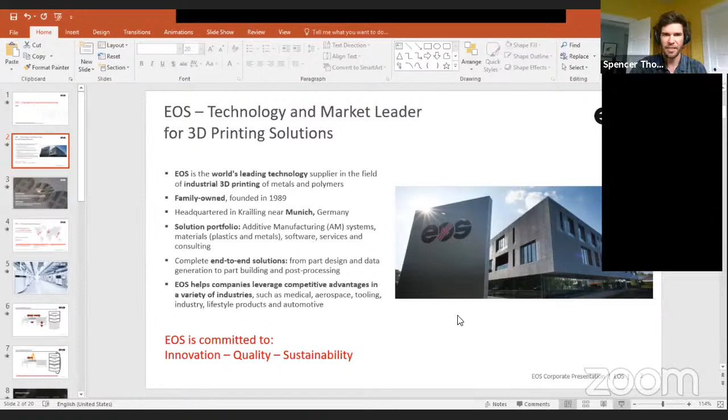And I think this statement here is important for EOS. We believe that additive manufacturing is going to provide a crucial part of the future of how we make parts as a society. And so everything that we do is trying to drive the adoption of additive manufacturing into new application spaces, new industries, and just get more and more parts made.

And just for understanding, you have been on the market since 1989, and you went first with SLS or with DMLS? Yeah, so it was SLS. I think one of the first ones was actually sand, if I'm not mistaken. So we used to make sand molds that could then be used to cast metal. But we started with polymer and then metal systems maybe 20 years ago. So you have been at the front of the line in these technologies.

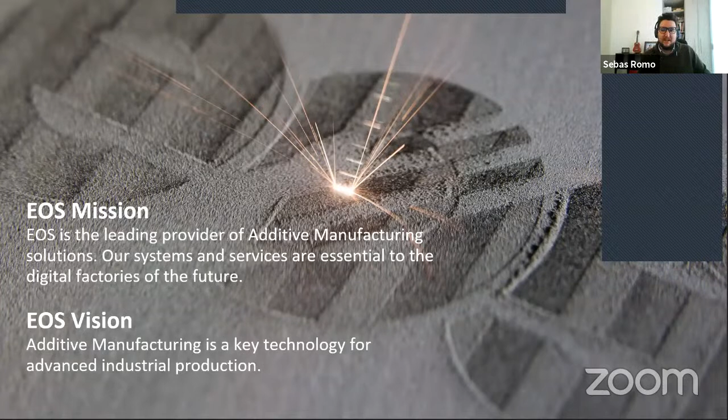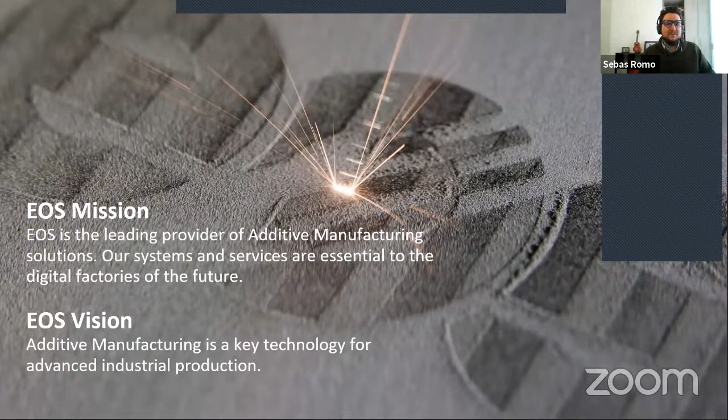Yeah, I'm the same age as EOS. So I was also born in '89. I'm also from '89, so yeah, nice, the same age. So please continue. Tell us more about EOS.

Yeah, just one more general slide. We've got well over 3,000 systems in the field now.

Metals has overtaken polymers, but it was only a few years ago that there was more polymer systems than metal systems. So now metals has overtaken polymers, which is a win for me. Our gross sales are roughly 350 million, and we have our headquarters in Munich, Germany, but we have 2 sites over in North America, one outside Detroit, and then our headquarters in North America outside of Austin, Texas, where I'm located.

Yeah, I had one more. Sorry, yeah, I think this picture is really cool.

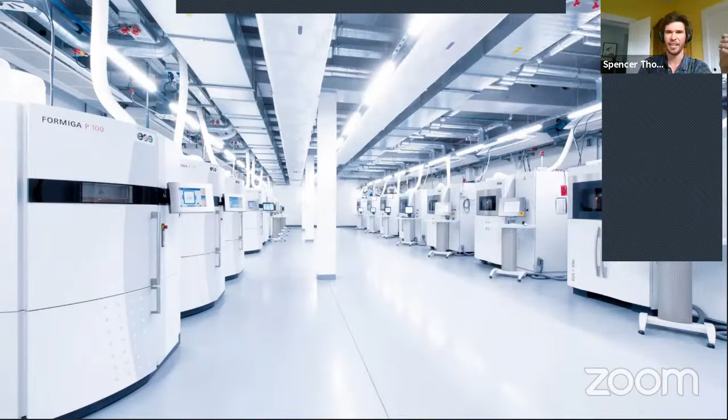So this kind of shows what the future of manufacturing will look like and does look like. This is a room in the basement of our headquarters in Germany. These are all polymer systems, actively manufacturing parts for our machine production. We produce a lot of parts such as ductwork and handles and things like that on our own systems. I just think it looks super cool to poke your head in that room and see all those machines running.

Printers doing printers, yeah, right. A little bit of a Terminator aspect to it, but of course.

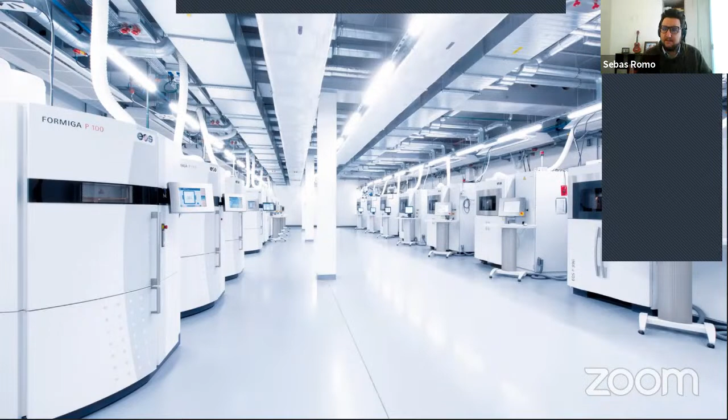Please tell us about, we have talked before with people in the webinar, we have explained mainly how the different additive technologies work, but please go ahead and tell us more on how metal 3D printing works.

Yeah, so it's pretty straightforward. It's based on having fine metal powder, and that powder is then consolidated with an energy source. For us, we use a laser. There's other ways, like the E-beam or different ways to consolidate the powder. But essentially, this is how it works in the diagram here.

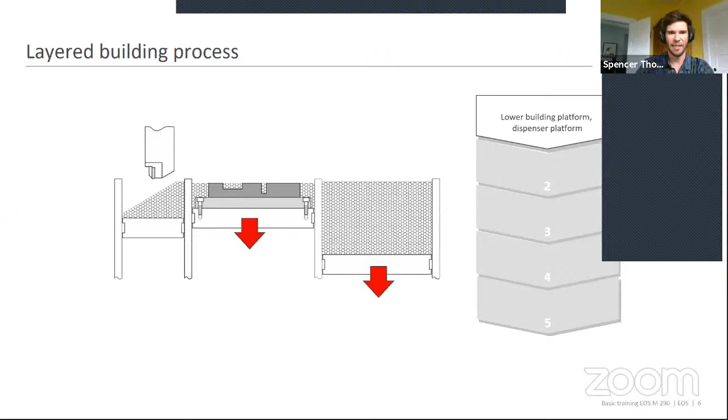On the right, we have our powder dispenser, and that's where we keep the clean powder. Then in the middle, we have our build platform. It's usually a similar alloy to what the powder we're printing with is. And then on the left, we have our overflow. This little piece in the middle is called a recoater.

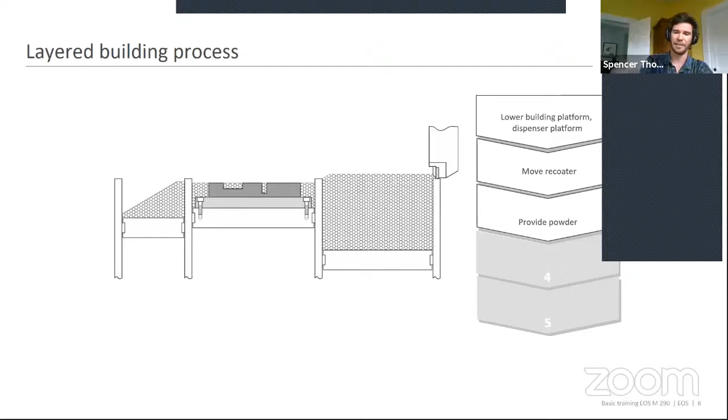So the recoater goes over, the powder dispenser comes up, and then we spread a layer of powder over our substrate. And then we use a laser to fuse that powder to the layer below it or the substrate. And then we do that thousands of times, and that eventually will have a part.

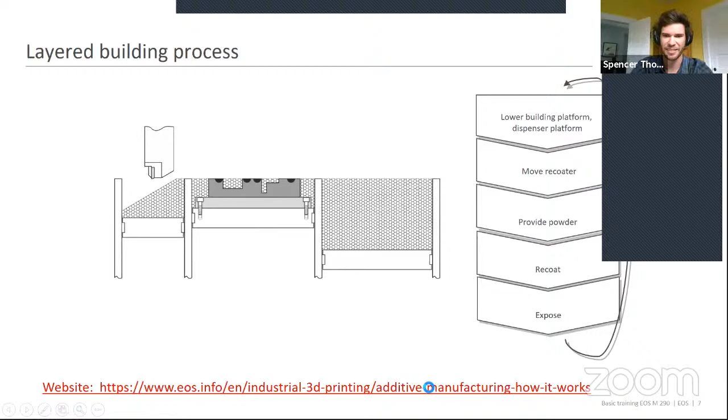It does. And you were telling us? Oh yeah, I was gonna see if this works. There's on our website a video, and it'll actually show you what it looks like in real life. So you can see here the lasers moving back and forth really quickly, and there's sparks flying everywhere. It's really, I've been in it for 9 years, and I never get tired of seeing it make parts. It's so cool to me.

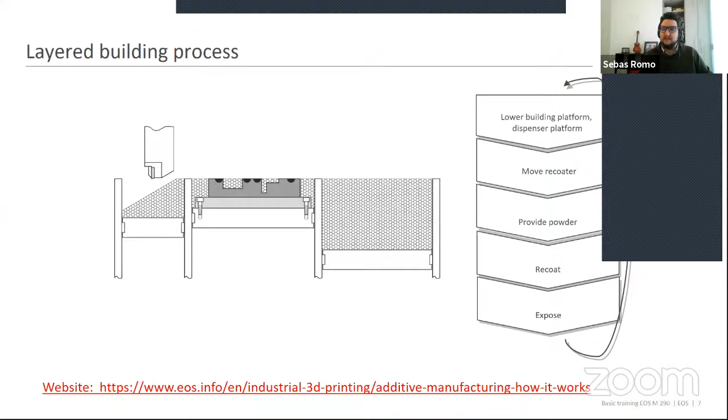So in terms of materials, we understand you can build in metals, but what type of metals? Are they the normal metals we use, or what's going on with the materials in metals? Yeah, so it started out with maybe 5 or 10 metals. So like 10 years ago, we probably had 5 or 10 metals that we printed, casting grade aluminums, stainless steels, titanium, these nickel alloys. These are used in the aerospace industry. Those are kind of the core ones for additive.

And since then, now EOS, we have about maybe 30 materials that we've developed. And it's like every month a new one comes out. So really with us, and then our partners and other people in just the additive space, this list of 30, I think, will be 50 in a year or two. And then from there, 5 years down the road, I could see hundreds of alloys possible.

And so when you're talking about alloys, additive manufacturing works with pure metals or with alloy metals?

So most of the time it's an alloyed metal. If you look at titanium 6-4, it's already titanium 6-4 in aerospace or medical, and then they just make it into powder form via an atomization process. But there's actually some interesting stuff going on with creating alloys in process. You could blend, say, copper and iron together in a certain ratio, and then make the alloy as we're building a part. You don't see as much of that, but it is also a possibility.

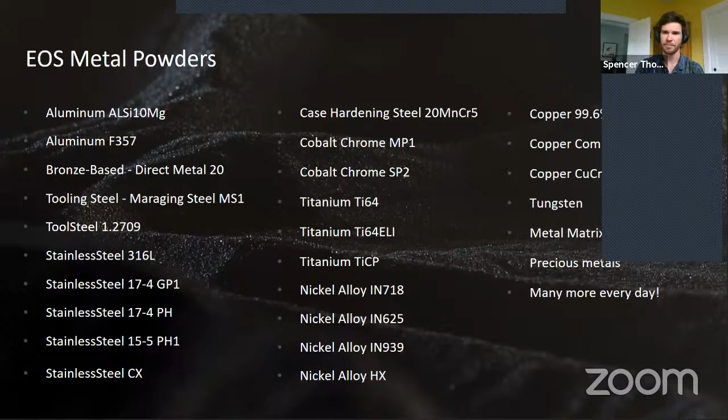So how's the powder made? There's a bunch of different ways. One of them is called gas atomization. What happens is we have a big vat of molten metal, and that molten metal goes through a nozzle, and then we use gas to kind of disturb it. Just like rainfall, you get little droplets that form, and that's how we get the round metal particles. That's just one of a handful of different ways to make it, but probably one of the more common ones.

I imagine so. Yeah, probably really hot in there.

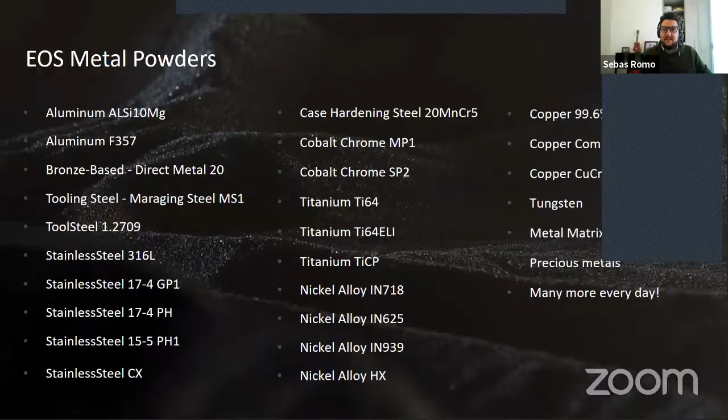One of the questions that people ask us a lot, and I wanted to share it with you: why 3D print in metal versus doing it in a more traditional way, machining or other metal methods we already know?

So that question is essentially why I have a job right now. We are all trying to figure that out. My job, and the team that I'm on, is called the Additive Minds team at EOS. Our job is to look at people's applications and try to understand if it's feasible for them to print, how we could make it feasible to print, and then help them through that process.

Especially several years ago - maybe a little less now as we have a better understanding of additive - we'd see somebody who saw 3D printing on a website, news, or webinar and thought, oh, that looks cool. So they go to their shop floor, look for parts, and find one that's maybe been made on a lathe for 30 years. Then they bring that part to us and say, I want to get into 3D printing, what do you think of this, can we print it? Generally the answer is yes, but should we? I think that's the conversation we have with customers.

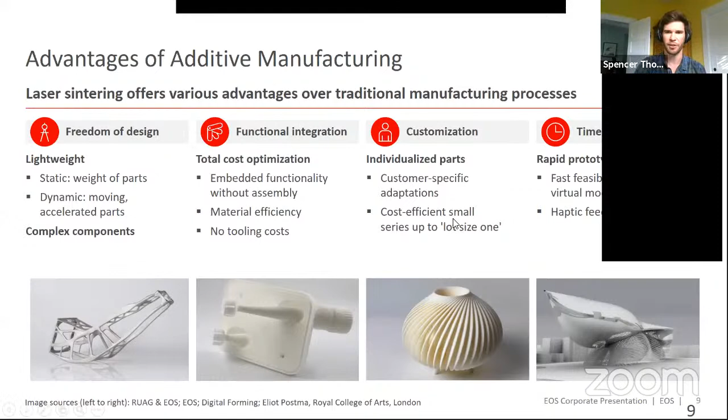And then I have a few examples if you want me to show actual ones. Yeah, please, people are looking forward to seeing all the examples.

I think this part's really great. This is for a project with GM. If you look at the left, it's a seat belt bracket that connects the seat belt to the frame of the car. You've got some machined parts, probably some laser cut and bent parts, and all that's assembled together.

We were able to take that application and look at what kind of loads it needs to hit, what space it needs to fit into, like mounting holes. Then we take this design tool called topology optimization and apply the loads we're expecting to see in operation.

The computer iterates, removing material where there's no load needed, running design examples over and over until you have something that meets the requirement. I think you'd have a tough time making this part any other way.

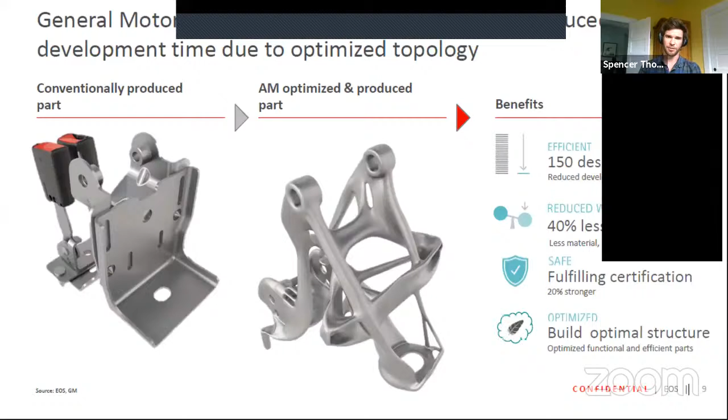But we are actively developing new powders and new parameters to build parts with those powders that speed up the process, and larger machines with multiple lasers—we have one machine with 4 lasers that can improve the cost of the part. Eventually I do believe we'll get there, because if we can make this close to the same price, there's not much of an argument.

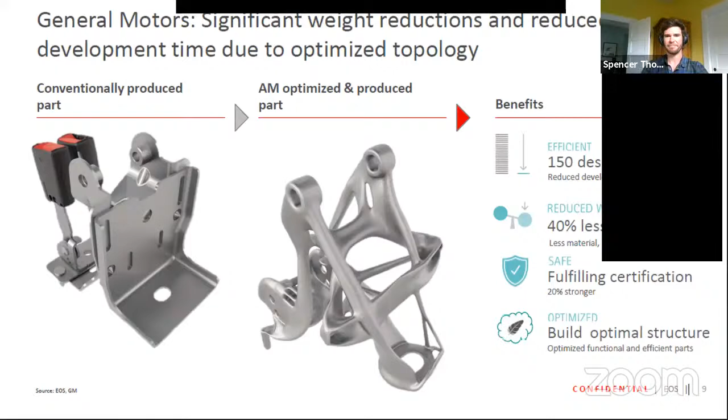We were able to see how the part fits into the aircraft and combine parts directly around it, eliminating 10 parts. A 35% weight reduction is huge in commercial aviation.

That's a huge win, because we're just moving hydraulic fluid around in these channels. There's a lot of material that's just there because it would be too costly, or you can't machine it away from the block. We're only using material around the channels we need, so we get that weight reduction while still meeting the same functionality and all regulation requirements. This is a really cool part.

For sure it is. What's the size of that part—small, medium? Probably that size, so a relatively small component. But I think we'll start to see more and more hydraulic manifolds done this way. It just kind of makes sense—as long as we can still meet performance requirements, the weight savings we get will always win.

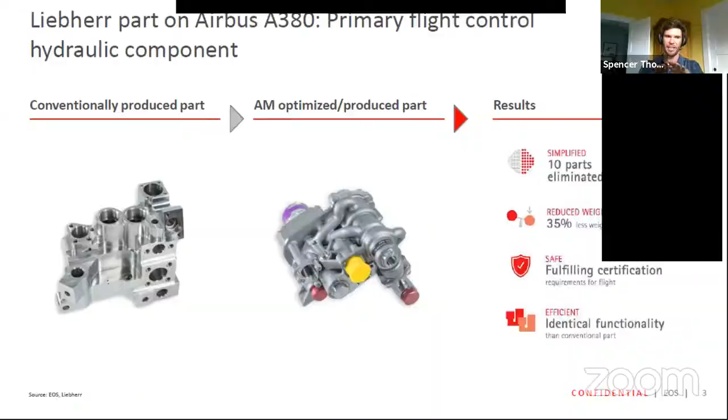For sure, yeah. And so it's a really complex process to try and figure out where all the costs are going to come from and what that part will actually end up costing you. And I think we've done a really good job with our consulting divisions to try and make sure that we encapsulate all of the costs that might go into it, so our customers understand what they're getting into, and we can maximize the outcome.

And for people watching us, also costs into additive depends on the size of the part. You can have small parts costing you $100 or big parts costing you thousands of dollars. So it depends on the geometry. There are a lot of things that drive the pricing into metals.

And do you have any other example or applications you want to show us before going into the next question, Spencer? Yeah, I had one more that I think we can talk about real quick.

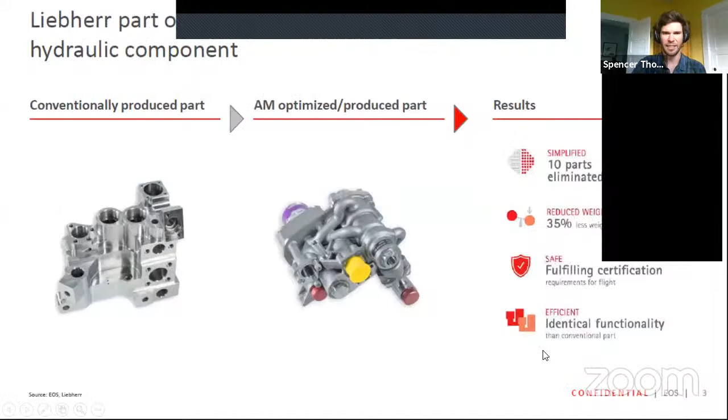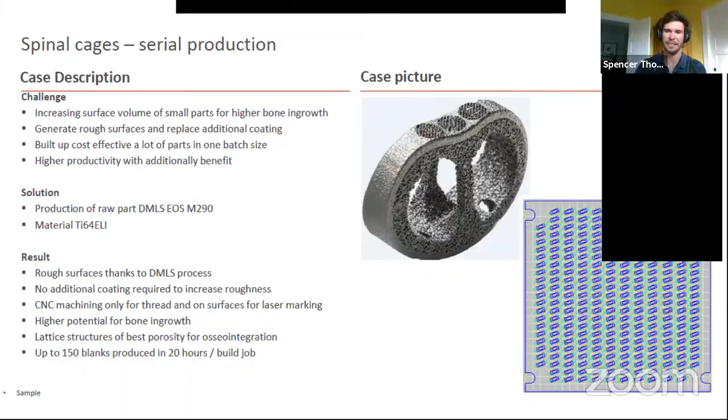It's really cool, actually. People are starting to ask if you can share more about that type of application. We will share it after. So we are going through different questions that people have been asking us.

One question from Andres: how long will it take to develop a new metal alloy for a specific customer, specific application? He gives the example that you have stainless steel or 316L, but if somebody wants to develop 420 steel, what will happen for that type of application?

Yeah, that's a great question. I lead the North American R&D team in metal here, and we develop new alloys and new parameters for those alloys. A lot of times the answer in 3D printing is it depends. We've had alloys that we really believe are weldable and castable, and we believe it'll be easy to develop those parameters - maybe we can turn that around in a month to get some starting points to start making parts. Then we've had other alloys that are more difficult for us to manufacture, and those projects have lasted 6 months to a year.